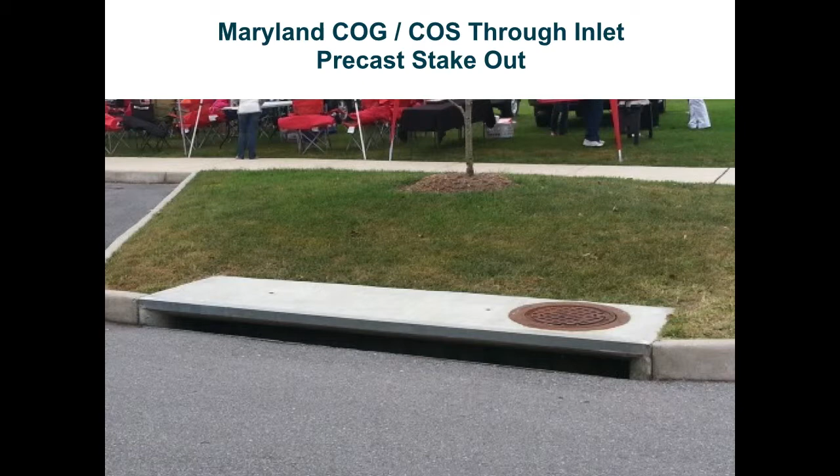Precast Stakeout for Maryland-style COG and COS curb slot inlets. Maryland-style COG and COS inlets are typically rectangular troughs that stack upon circular manhole sections.

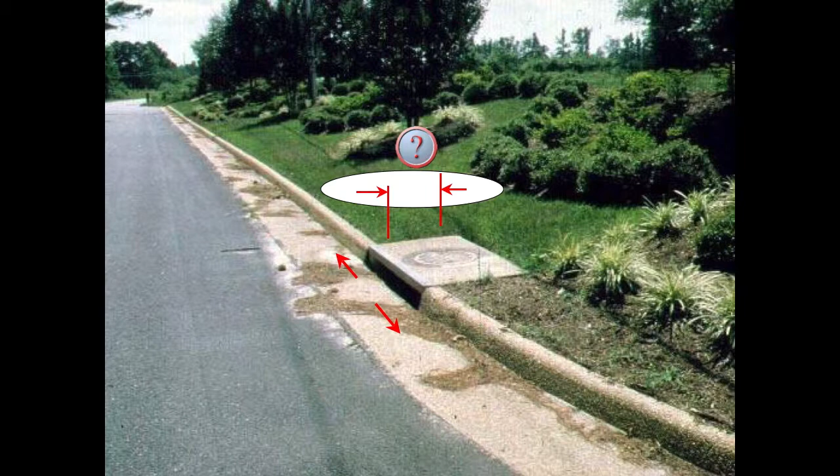When installing precast inlets, the distance from the curb line to the center of the inlet and the distances along the curb line are different than for cast-in-place inlets. For nomenclature, we will use the clock face positions as if we were standing in the roadway and facing the inlet. The lower sections are typically round and will have a transition slab with an offset hole.

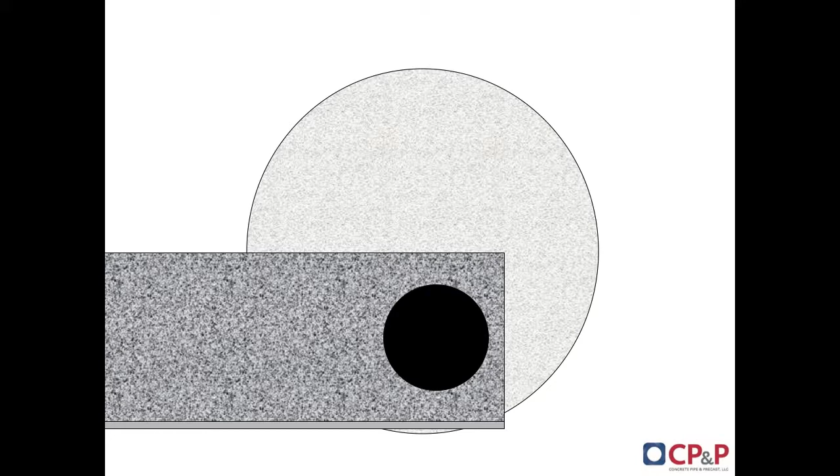The slab can be rotated so as to line up with the steps in the sections below. The precast trough section is then placed on the slab using a grout interlock. Typically, the inlets are fabricated with the steps at either the 3 or the 9 o'clock position. This allows field adjustment both towards the roadway or away from the roadway should it become necessary.

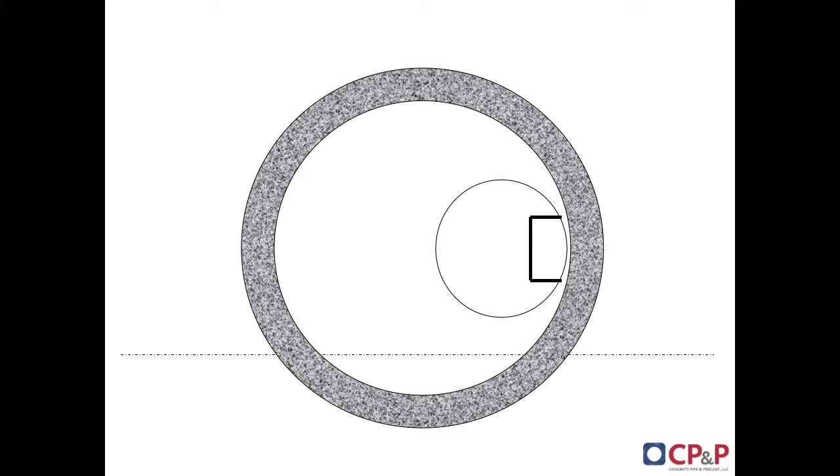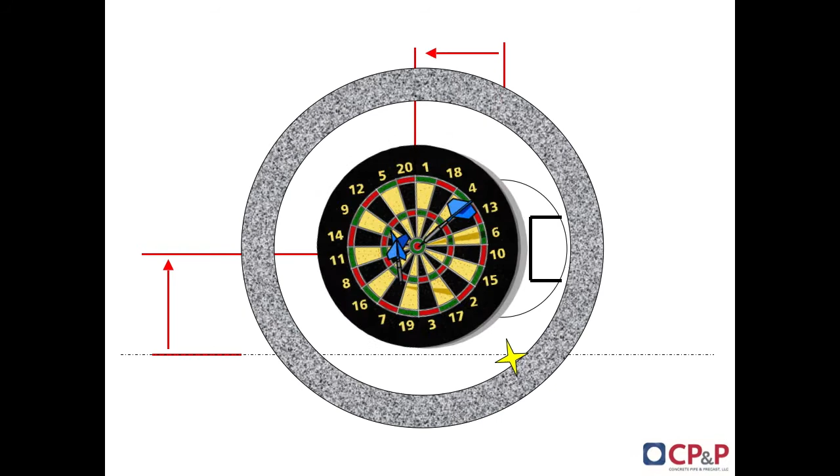Given the distance from the curb line to the center of the base section and the distance either left or right from a reference point, the chamber section can be accurately located in the field. This reference point is located along the face of curb and it is centered on the COS inlets. For COG inlets, the reference point is located at 23 inches from the lower end.

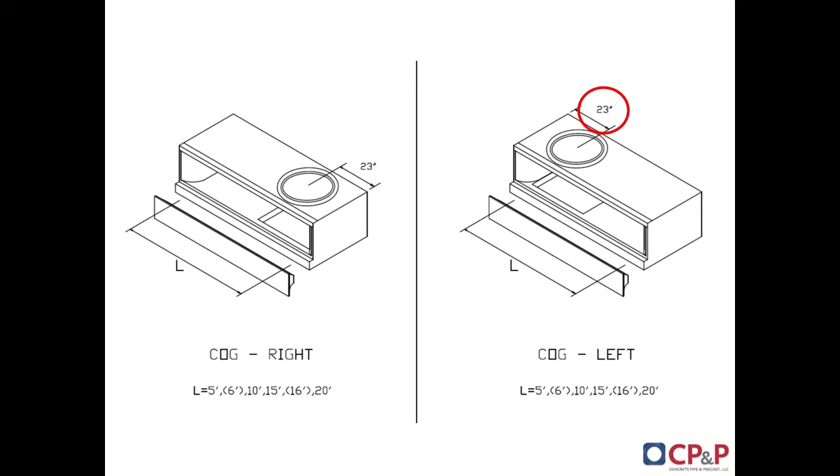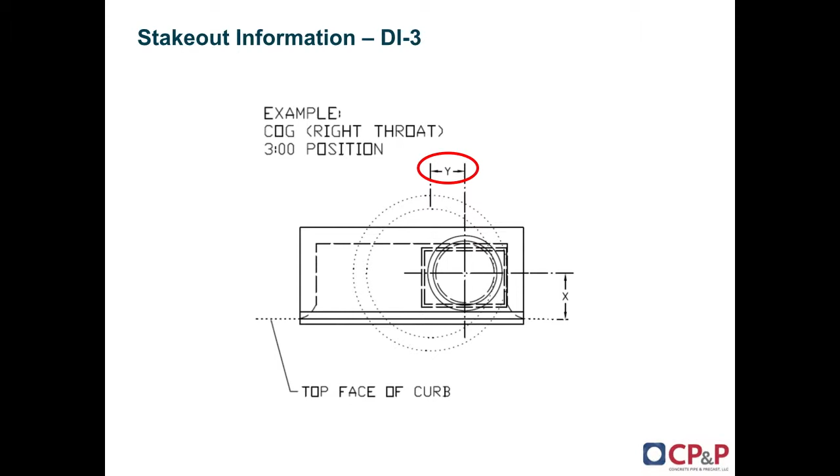The CP&P Stakeout Manual provides information to properly stake out precast Maryland-style COG and COS inlets. Here's an example we can look at. Let's say we have a Maryland-style COG inlet that's 5 foot long and it's a right-hand orientation. It's going to be manufactured on a 48-inch diameter base section. We are told that the steps are at the 3 o'clock position.

We can look in the CP&P Stakeout Manual and find that the X dimension is 16 inches behind front face of curb, and the Y dimension is 6 inches to the left of the reference point. Assuming we can locate the face of curb on our project, and we know that our 5-foot inlet, the two ends will be located at 2 points along that face of curb, we can begin our stakeout.

Because the precast COG trough is 1 foot longer than the throat, 6 inches on either side, the outside corners can then be located at 6 inches to the right or left of the throat locations. We are told that the flow is running from left to right because it is a right-hand inlet. The reference point is going to be along the face of curb, 23 inches from the lower end.

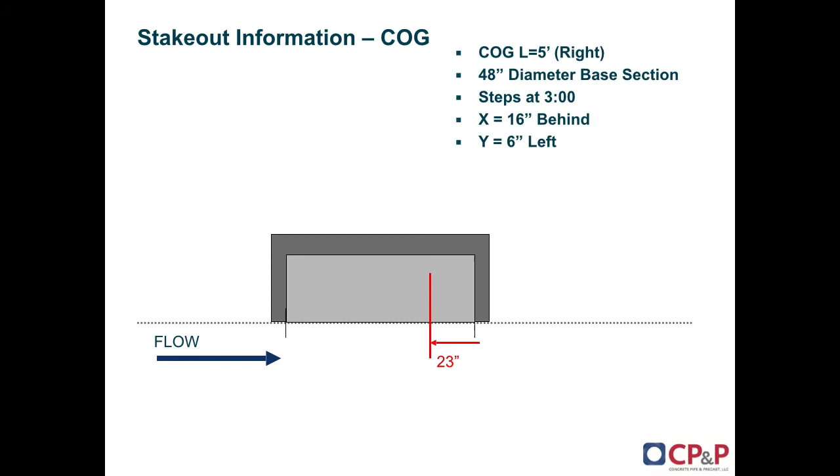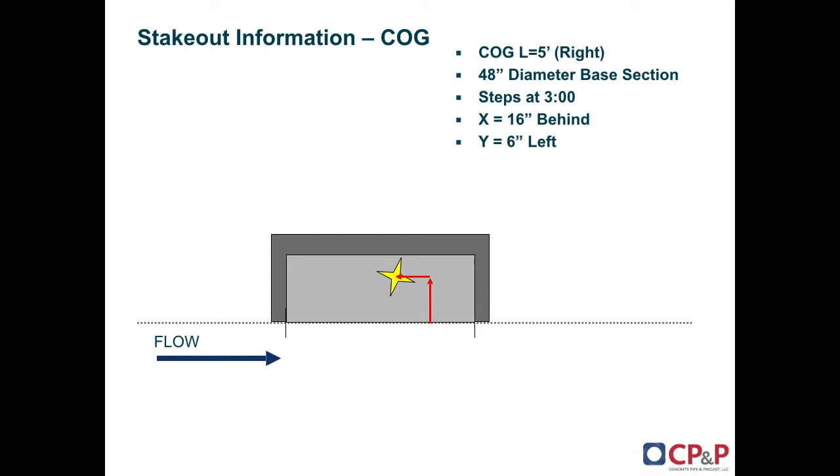Given our X dimension is 16 inches behind top front face of curb, and our Y dimension is 6 inches to the left, we can now locate where the center of our base unit needs to be located for everything to work out. And you can see that following that instruction, the center of a 48-inch diameter base section with a 5-foot COG inlet, steps at 3 o'clock, line up appropriately.